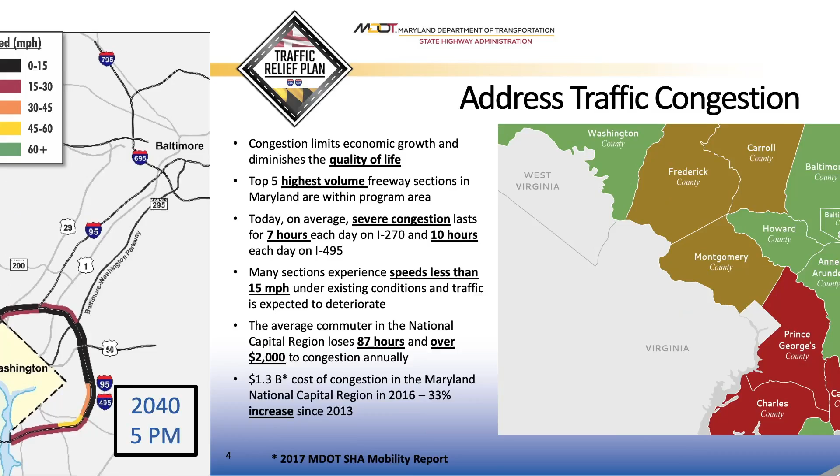In 2016, the cost of congestion was estimated at $1.3 billion in the Maryland National Capital Region. This was a 33% increase since 2013. A recent independent study calculated that the average driver here loses 87 hours and over $2,000 each year due to congestion. As the population in the National Capital Region is projected to increase by 1.3 million people by 2040, traffic congestion will continue to grow on I-495 and I-270 if we don't do something to address the problem.

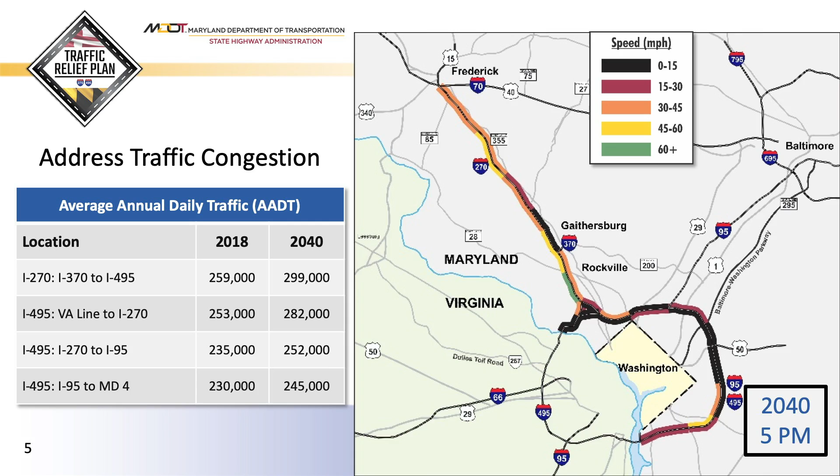The National Capital Region Transportation Planning Board, which is the metropolitan planning organization for the region, recently completed a long-range transportation plan, known as Visualize 2045. As part of Visualize 2045, significant investment is planned for public transportation in the National Capital Region through 2045, at nearly a 2-to-1 ratio when compared to highway improvements.

The Planning Board recognizes and acknowledges that transit alone cannot address the travel demand in the region, and a balanced transportation network, including highway improvements, is needed. In fact, the Visualize 2045 plan, which the region approved, explicitly calls for a regional network of managed lanes. I-495 and I-270 are part of this plan.

The I-495 and I-270 P3 program is more than just highway improvements. While it includes over 70 miles of interstate in Maryland along I-495 and I-270, it will also enhance existing and planned mobility and connectivity for other modes of travel, including transit. The P3 program begins at the George Washington Memorial Parkway in Virginia, where the Virginia Department of Transportation's I-495 Northern Extension, or NEXT, project ends. It is an independent study looking to extend their express lanes 2.5 miles north to the American Legion Bridge.

Our program will tie into those improvements, addressing the regional bottleneck of the American Legion Bridge, and then continue along the Capital Beltway, ending west of Maryland Route 5. The program also includes I-270 from the east and west spurs at the Capital Beltway up to I-70 in Frederick.

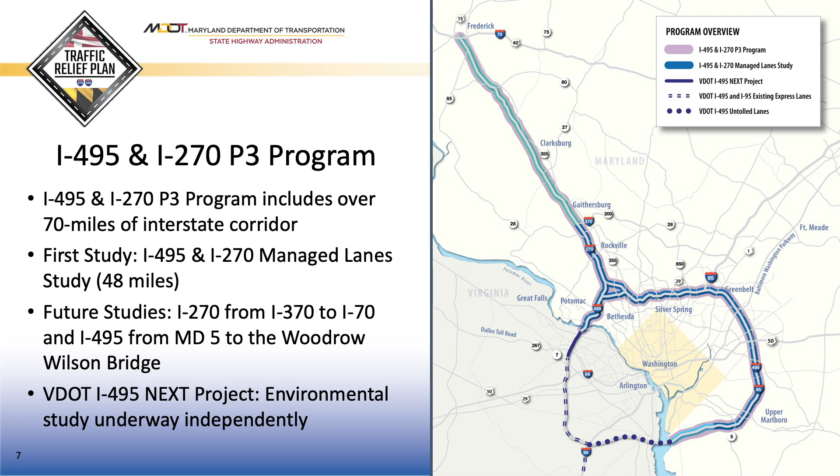To implement any improvements of a build alternative, a potential phasing plan is being considered. It is proposed to be implemented in 3 phases. Phase 1 would start on I-495 at the George Washington Memorial Parkway in Virginia, include improvement of the American Legion Bridge, and extend to I-95.

Phase 2A on I-270 would start at I-495 and extend to I-370, while Phase 2B on I-495 would start at I-95 and extend to west of Maryland Route 5. This phasing would address the most congested highway segments first and allow Phases 2A and 2B to be delivered at the same time. We envision that Phase 1 would begin shortly after approval of a record of decision.

Construction could start in late 2021, and Phases 2A and 2B would begin within 2 years of beginning Phase 1. Phases 3A and 3B will be part of future environmental studies, with preliminary planning for Phase 3B beginning this spring.

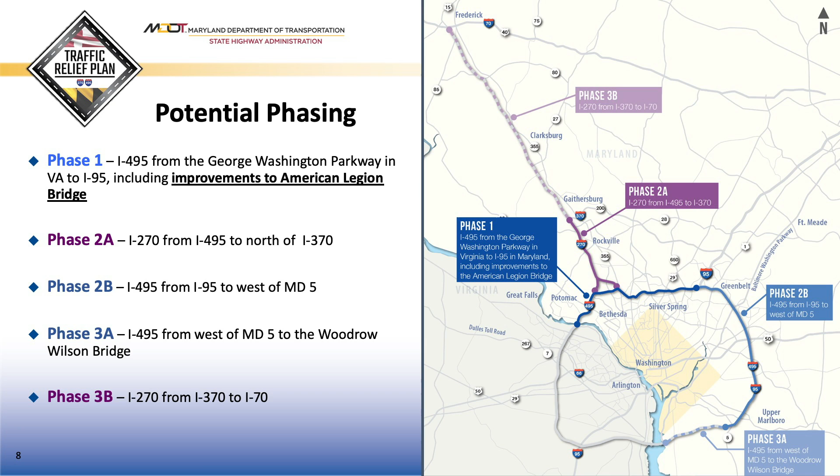The I-495 and I-270 Managed Lane Study is carefully following the National Environmental Policy Act, also known as NEPA. NEPA is a federal law that is procedural in nature, which means it dictates a decision-making process and not the final outcome. The NEPA process began with issuing a notice of intent to initiate the environmental review process and holding multiple scoping meetings last April.

The purpose of those meetings was to seek public input into the scope of the study, including the purpose and need, potential alternatives, and environmental considerations. We then held several public workshops last July to seek public input on the preliminary range of alternatives. The current series of public workshops are intended to present the traffic, environmental, and financial analysis of the screened alternatives and identify the recommended alternatives retained for detailed study.

The purpose and need of this study reflect concerns related to the I-495 and I-270 corridors that have been identified by state, local, and regional transportation professionals over many years, not universal transportation policy concerns. The purpose of this study is to develop a travel demand management solution that addresses congestion, improves trip reliability on I-495 and I-270 within the study limits, and enhances existing and planned multimodal mobility and connectivity.

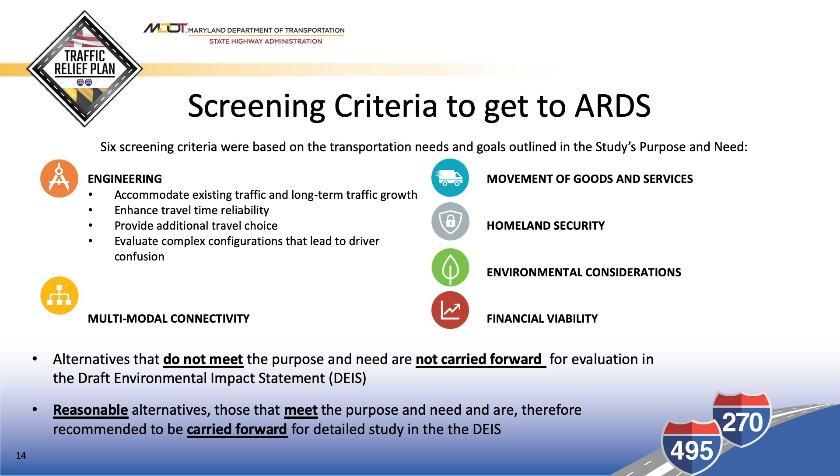Since the initial screening, additional traffic, financial, and environmental analyses have been completed on the screened alternatives. Based on those results, we found that all 7 screened alternatives are considered reasonable, meaning they meet the purpose and need, and are all recommended to be retained for detailed study in the draft environmental impact statement.

The next 7 slides show graphical representations of the typical section for each alternative retained for detailed study, and highlight some global measures of our analyses. For further details, such as specific traffic information for trips, noise, and other environmental information, we encourage you to review the presentation boards available at our public workshops and under Meeting Materials Open House Display Boards on the website.

Each build alternative includes the addition of either high occupancy toll, known as HOT lanes, or express toll lanes, known as ETLs. The difference between HOT lanes and ETLs is that ETLs require all vehicles that use the lane to pay a toll, whereas HOT lanes allow for reduced tolls when a vehicle has a minimum number of passengers.

A few other general points to note on the HOT lanes and ETLs. These lanes will be separated from the general purpose lanes by a buffer with flexible posts, similar to what you see on I-495 in Virginia. Access is being planned generally from interchanges and designated ramps only to the HOT and ETL system. You can see these locations under Meeting Materials Open House Display Boards on the website. Access of this type is generally safer and improves operations of the overall system.

Alternatives that consider an ETL system would retain the HOV lane on I-270 as it is today, with access from the general purpose lanes. Additionally, on I-270, the collector-distributor roadway system is proposed to be removed from all build alternatives in response to public comment to minimize impacts and stay within the existing footprint.

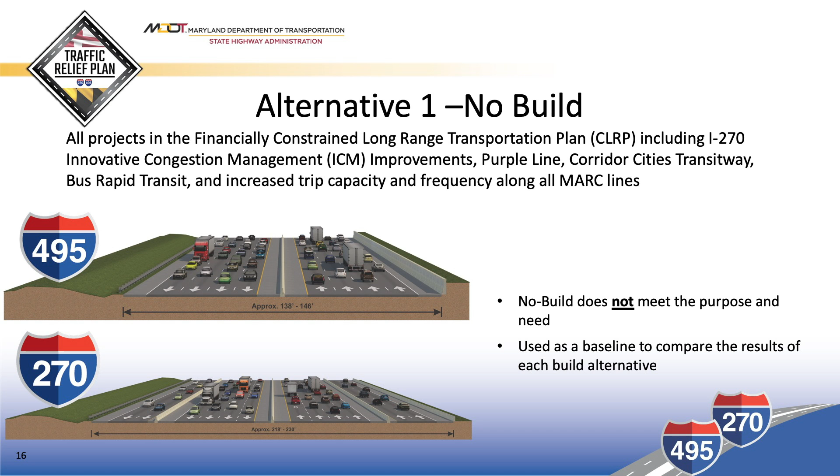The first alternative that is recommended to be retained for detailed study is no build. It considers all projects in the constrained long-range plan, including significant transit improvements like the Purple Line, multiple planned bus rapid transit projects, and increased MARC capacity and frequency, but does not include any of the build improvements considered in the next 6 alternatives. Because this alternative does not meet the purpose and need, it is being used as a baseline to compare the results of each build alternative versus not building the potential improvements for each alternative.

This alternative would reduce delay by 20% in the morning and 22% in the evening when compared to the no build, and would decrease delay on the local system by 3.2%. The average savings per commuter would be 45 hours and $900 per year. This type of single-lane system, however, would be constrained by the slowest moving vehicle, be less reliable, and less flexible to adapt to incidents.

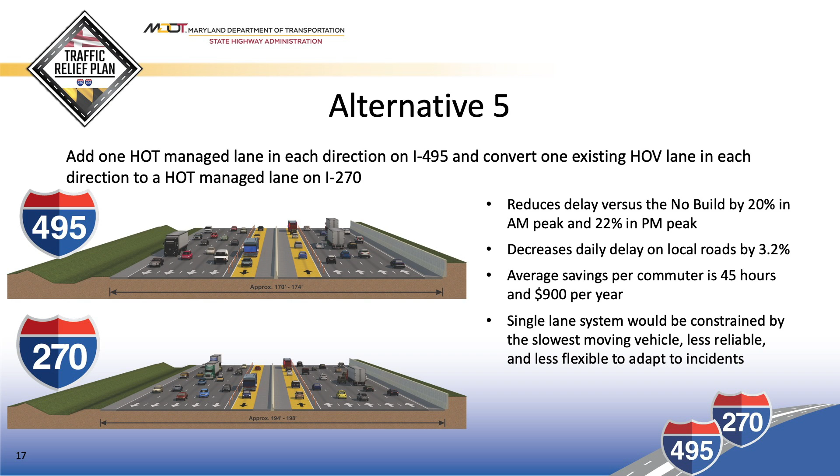Alternative 8 provides a 2-lane express toll lane system on I-495 in each direction, and 1 ETL on I-270 in each direction. To add the ETL system, 2 lanes are added in each direction on I-495 and 1 in each direction on I-270, while retaining the high-occupancy vehicle lanes.

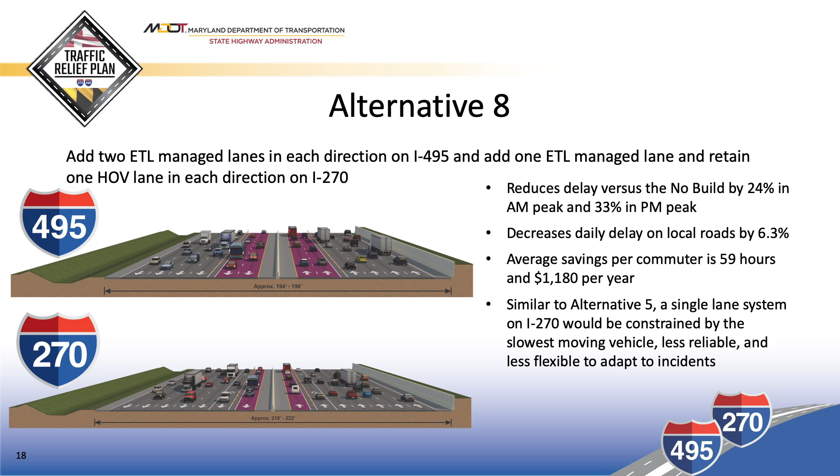This alternative would reduce delay by 24% in the morning and 33% in the evening when compared to the no build, and would decrease delay on the local system by 6.3%. The average savings per commuter would be 59 hours and $1,180 per year. Similar to Alternative 5, this type of single-lane system on I-270 would be constrained by the slowest moving vehicle, be less reliable, and less flexible to adapt to incidents.

Alternative 9 provides a 2-lane high-occupancy toll lane system on both I-495 and I-270 in each direction. 2 lanes are added in each direction on I-495 and 1 in each direction on I-270. The existing HOV lane is also converted to a HOT lane.

This alternative would reduce delay by 34% in the morning and 33% in the evening when compared to the no build, and would decrease delay on the local system by 6.8%. The average savings per commuter would be 73 hours and $1,460 per year. Because it has multiple lanes in each direction, this type of system would allow for passing of slower moving vehicles, be more reliable, and more adaptable to incidents than single-lane or reversible alternatives.

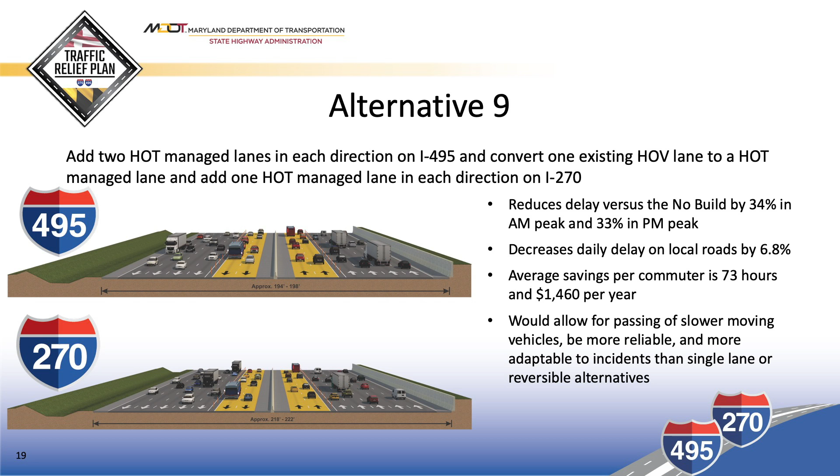Alternative 10 provides a two-lane express toll lane system on both I-495 and I-270 in each direction. 2 lanes are added in each direction on I-495 and on I-270. The existing HOV lane is retained on I-270.

This alternative would reduce delay by 35% in the morning and 35% in the evening when compared to the no-build, and would decrease delay on the local system by 6.4%. The average savings per commuter would be 72 hours and $1,440 per year. Because it has multiple lanes in each direction, this type of system would allow for passing of slower-moving vehicles, be more reliable, and more adaptable to incidents than single-lane or reversible alternatives.

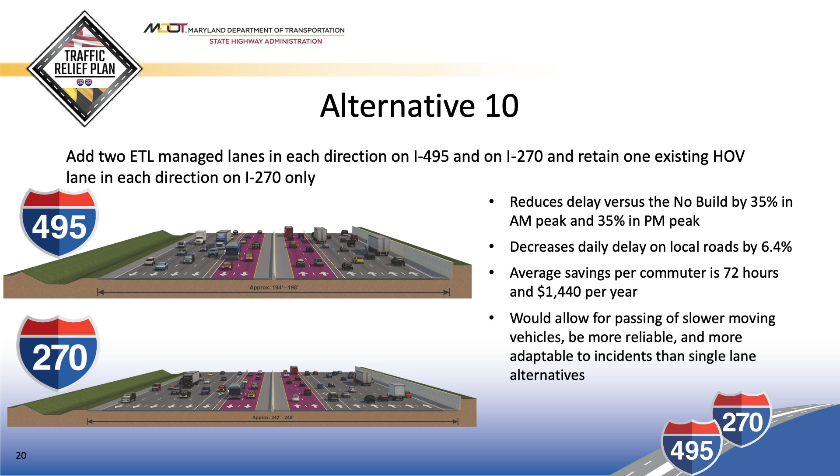Alternative 13B is similar to Alternative 9 on I-495, with a two-lane high-occupancy toll lane network in each direction. On I-270, however, a two-lane reversible HOT lane network is provided by converting the existing HOV lanes into reversible HOT lanes. The HOT lanes would generally operate in the southbound direction in the morning and the northbound direction in the evening, with an approximate 2 to 2.5 hour shutdown in the afternoon and overnight to allow the lanes to reverse.

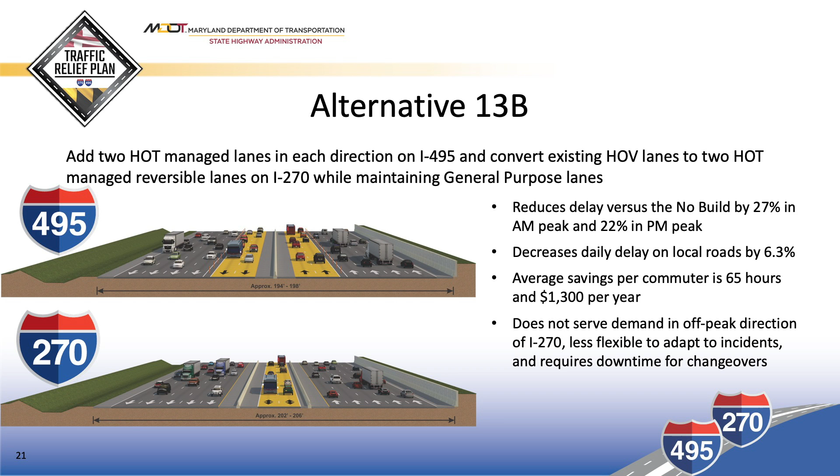This alternative would reduce delay by 27% in the morning and 22% in the evening when compared to the no-build, and would decrease delay on the local system by 6.3%. The average savings per commuter would be 65 hours and $1,300 per year. It would not serve demand in the off-peak direction, would be less flexible in adapting to incidents, and requires downtime for changeovers.

Alternative 13C is the same as Alternatives 8 and 10 on I-495, providing a two-lane express toll lanes network in each direction. On I-270, however, a two-lane reversible ETL network is provided by adding 2 lanes and retaining the HOV lanes separately as they exist today. The reversible ETLs would operate the same as the reversible HOT lanes in Alternative 13B.

This alternative would reduce delay by 26% in the morning and 35% in the evening when compared to the no-build, and would decrease delay on the local system by 6.2%. The average savings per commuter would be 64 hours and $1,280 per year. It would not serve demand in the off-peak direction, would be less flexible in adapting to incidents, and requires downtime for changeovers.

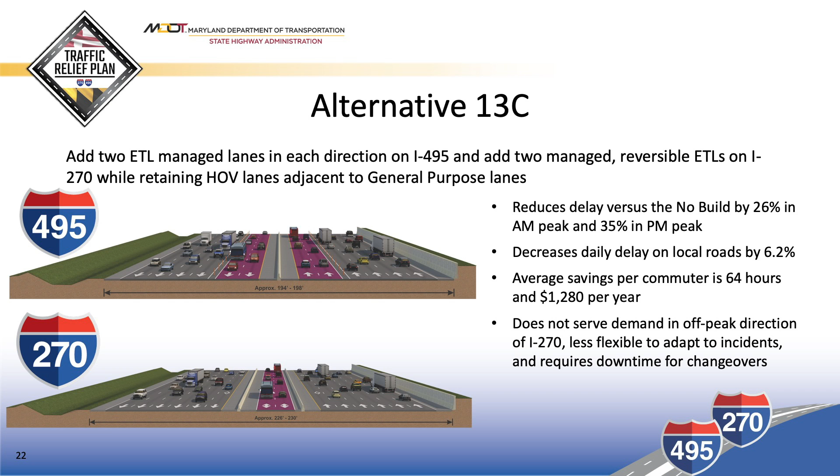We are looking to provide significant multimodal improvements and opportunities for Marylanders traveling around and living within the National Capital Region. This includes improving access and connectivity for transit riders, pedestrians, and bicyclists. We are also looking to enhance direct and indirect access to transit stations and planned transit-oriented developments near I-495 and I-270, like those at Shady Grove, Greenbelt Metro, New Carrollton, Largo, and Branch Avenue, making it easier for people to get to Metro lines, MARC lines, and the Purple Line.

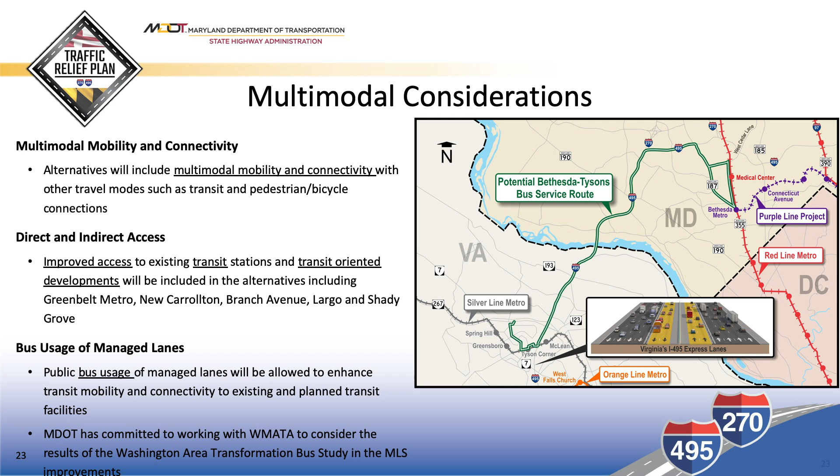Enhanced transit service is also a complement to managed lanes. Whether it's a more reliable trip for those riding the bus or creating incentives for carpool and vanpool formation, there are significant benefits and reasons for transit and ride-sharing groups to see the advantages of managed lanes. For example, public buses will be allowed to use the ETLs and HOT lanes in each of the proposed alternatives, improving travel times for riders. The map on the right shows a potential express bus route connecting activity centers in Bethesda and Tysons.

Express toll lanes, or ETLs, and high-occupancy toll lanes, or HOT lanes, can benefit everyone, even those who may never use them. That's because these lanes provide the opportunity for travelers to choose to pay a toll for guaranteed reliable and reduced travel times. And when some people use these new lanes, travelers in the free lanes will see reduced travel times as well. Travelers on the I-495 and I-95 HOT lanes in Virginia and the I-95 ETLs north of Baltimore have experienced this effect firsthand.

Some ask why we are only looking at ETL and HOT lanes now. Both ETLs and HOT lanes would operate using congestion pricing, meaning that toll prices change based on real-time traffic conditions. This ensures that traffic in the lanes continues to flow, moving more traffic in the lanes than the same number of general-purpose lanes could. The Federal Highway Administration notes that congestion pricing has been the single most viable and sustainable approach to reducing congestion.

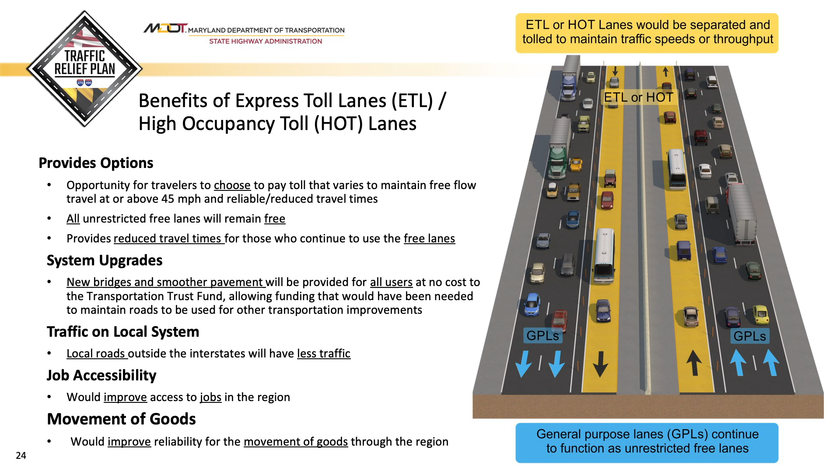In addition to more efficiently moving traffic through the corridor, the overall system will also be upgraded. The long-standing regional bottleneck at the American Legion Bridge will finally be eased. New bridges and smoother pavements will be provided at no cost to the Transportation Trust Fund, which means more funding can be utilized for other vital transportation improvements across the state. The improvements to I-495 and I-270 will reduce traffic on local roads, improve access to job centers by an estimated 10 to 15%, and play a vital role in efficiently moving goods through the region, which is especially important since the amount of freight shipped through Maryland is expected to double in the next 25 years.

Now that we've seen what's been done, let's talk about what's next. After these workshops, we will complete more detailed analysis of the alternatives retained for detailed study and identify the MDOT SHA recommended preferred alternative. All of this detailed information will be documented in the draft environmental impact statement and technical reports to be released to the public at the end of the year. Early next year, we will hold public hearings and take formal testimony. By fall of 2020, we will address all comments and release the final environmental impact statement and record of decision.

We will be working to further avoid and minimize any potential property needs that have been preliminarily identified as we continue to develop the environmental impact statement. If property is needed, we would start that process after the record of decision. Shortly after the record of decision, we expect additional federal approvals and permits to be issued, so we may move forward with construction of the first phase of the study beginning by late 2021.